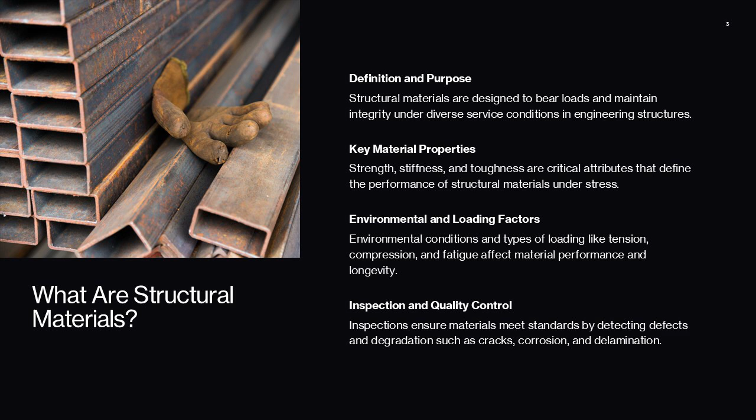From an inspection perspective, structural materials require strict adherence to specifications and traceability to ensure compliance with standards. Inspectors must look for defects such as cracks, voids, inclusions, and delamination, as well as degradation mechanisms like corrosion and creep that can compromise long-term performance. Understanding these fundamentals is essential for engineers and inspectors to make informed decisions about material selection, maintenance, and failure analysis.

The behavior and performance of structural materials are governed by an interconnected framework often described as the structure, processing, properties, performance relationship. Structure refers to the arrangement of atoms, molecules, or grains within a material, including bonding type, crystal lattice, phases, and defects such as dislocations and pores. Processing encompasses the manufacturing routes that define this structure, such as casting, forging, rolling, heat treatment, sintering, molding, and curing.

Properties are the measurable responses of the material to external stimuli, including mechanical, thermal, electrical, and chemical characteristics. Performance is the ultimate measure of how well the material fulfills its intended function under service conditions, considering factors like strength-to-weight ratio, fatigue life, and corrosion resistance.

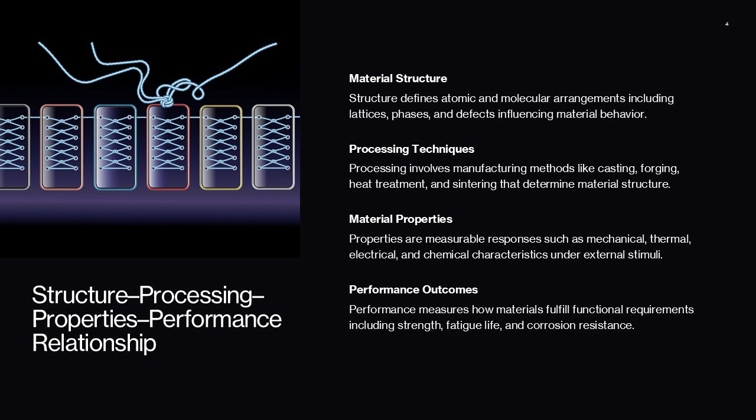For example, in metals, heat treatment can alter phase composition and dislocation density, significantly changing hardness and toughness. Ceramics rely on sintering to reduce porosity and enhance strength, while polymers achieve desired thermal stability through curing and cross-linking. Composites derive their properties from fiber orientation and matrix quality, which are controlled during layup and curing. This systemic view emphasizes that material selection and inspection must account for processing history, as it directly influences microstructure and, consequently, performance.

Materials are classified into metals, ceramics, polymers, and composites. Each class has unique bonding types and properties that influence their applications. Structural materials are broadly classified into four major families: metals, ceramics, polymers, and composites. Metals are crystalline solids characterized by metallic bonding, which provides ductility and high electrical and thermal conductivity. They are further divided into ferrous, iron-based, and non-ferrous categories.

Ceramics include crystalline oxides, carbides, nitrides, glasses, and cements, bonded ionically or covalently, resulting in high hardness and temperature resistance but low toughness. Polymers consist of long-chain organic molecules and are categorized into thermoplastics, which can be remelted, thermosets, which form irreversible cross-linked networks, and elastomers, which exhibit rubber-like elasticity. Composites combine two or more distinct phases, typically a matrix and reinforcement, to achieve tailored properties such as high strength-to-weight ratios and improved damage tolerance.

Bonding plays a fundamental role in determining properties: metallic bonding allows dislocation motion, enabling ductility. Ionic and covalent bonds confer hardness and high melting points but limit plasticity. Secondary bonds like van der Waals forces govern polymer flexibility and viscoelastic behavior. Understanding these classifications and bonding mechanisms is crucial for predicting material behavior and selecting appropriate candidates for specific applications.

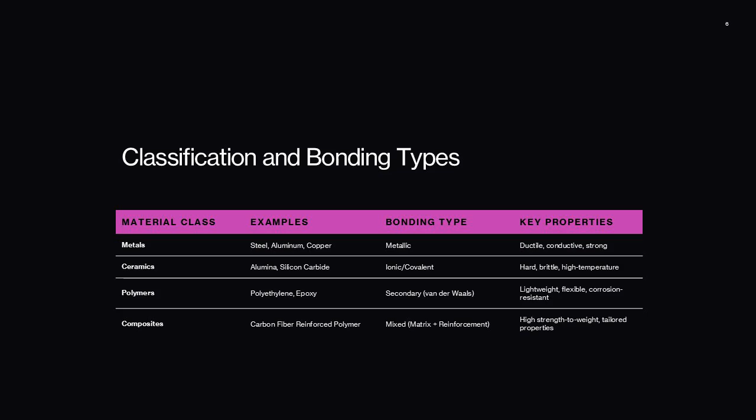Metals are widely used due to their strength and versatility. Let's look at their structure and properties, and the distinction between ferrous and non-ferrous metals. Metals are characterized by crystalline microstructures composed of grains with specific lattice arrangements such as face-centered cubic or FCC, body-centered cubic or BCC, and hexagonal close-packed or HCP. These structures influence mechanical properties like ductility, toughness, and strength.

Metallic bonding allows dislocation movement, which imparts ductility and enables plastic deformation. Metals exhibit high electrical and thermal conductivity, making them suitable for structural and functional applications. Their properties can be extensively modified through alloying and heat treatment processes. For instance, quenching and tempering in steels adjust hardness and toughness, while solution treatment and aging in aluminum alloys enhance strength. Common processing methods include casting, forging, rolling, machining, and welding, each affecting grain size and phase distribution.

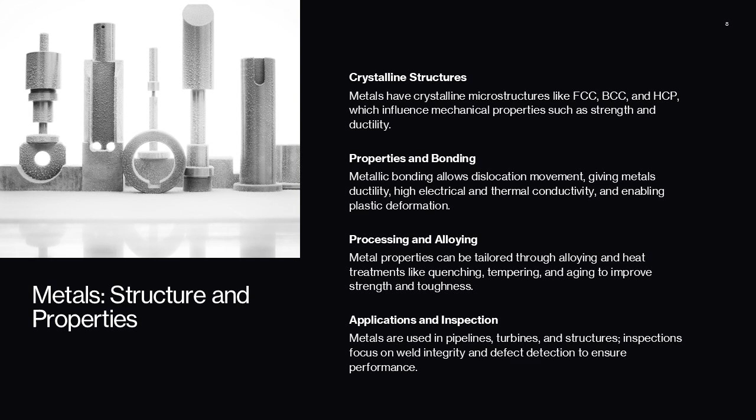Metals are widely used in pipelines, pressure vessels, structural frameworks, turbines, and electrical components. Inspection of metals focuses on weld integrity, heat treatment verification, and detection of defects such as cracks, inclusions, and porosity, which can compromise performance under load.

Ferrous metals, primarily iron-based alloys, include carbon steels, low alloy and high alloy steels, stainless steels, and cast irons. They dominate structural applications due to their cost-effectiveness, versatility, and wide property range achieved through alloying and heat treatment. Stainless steels offer corrosion resistance through chromium additions, while cast irons provide excellent damping and castability. Non-ferrous metals encompass aluminum and its alloys, copper alloys, nickel-based superalloys, titanium, and magnesium.

These materials are selected for specific attributes such as lightweight for aluminum, high conductivity for copper, high temperature strength for nickel alloys, and exceptional strength-to-weight ratio for titanium. Selection criteria often involve balancing strength, corrosion resistance, temperature capability, cost, and availability. Applications range from aerospace components and marine structures to high-temperature turbine blades and chemical processing equipment. Understanding these distinctions is essential for engineers to optimize material performance in diverse environments.

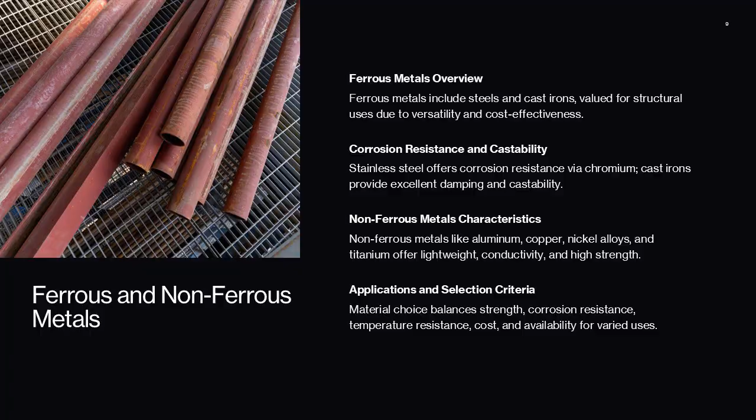Ceramics are known for hardness and temperature resistance but are brittle. We'll examine their structure, characteristics, and limitations. Ceramics are inorganic, non-metallic materials bonded ionically or covalently, resulting in exceptional hardness, high stiffness, and outstanding temperature resistance. They include crystalline oxides, carbides, nitrides, glasses, and cements. While ceramics excel in wear resistance and chemical stability, they are inherently brittle due to limited plastic deformation, making fracture toughness a critical design consideration.

Processing typically involves powder synthesis, forming methods such as pressing or slip casting, and sintering to achieve densification. Glasses are produced through melting and quenching, while cements harden via hydration reactions. Applications span wear-resistant surfaces, cutting tools, refractories, thermal barrier coatings, electrical insulators, and biomedical implants. Inspection focuses on porosity, microcracks, incomplete densification, and thermal shock damage, as these defects significantly affect reliability. Engineers must design components to minimize tensile stresses and stress concentrations, often employing compressive loading strategies to mitigate brittle failure.

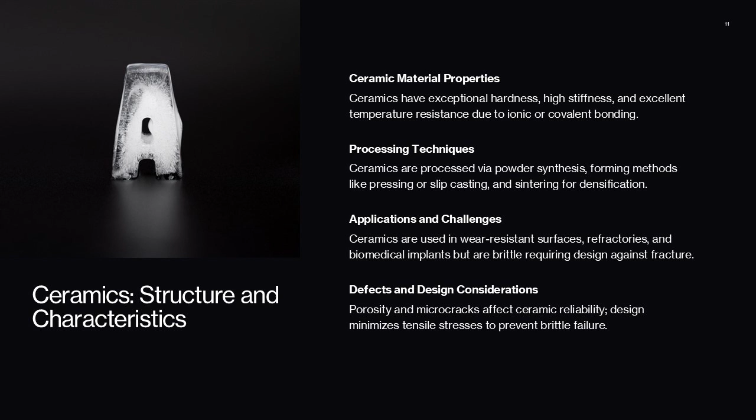Ceramics offer remarkable advantages, including hardness, wear resistance, chemical inertness, and the ability to withstand extreme temperatures. These properties make them indispensable in applications such as refractories, glass linings, and thermal barrier coatings. However, their brittleness and sensitivity to flaws pose significant challenges. Crack initiation and propagation can occur suddenly, leading to catastrophic failure. Toughening strategies include incorporating fiber or particulate reinforcements, utilizing phase transformation mechanisms, such as zirconia toughening, and refining microstructure to reduce flaw size.

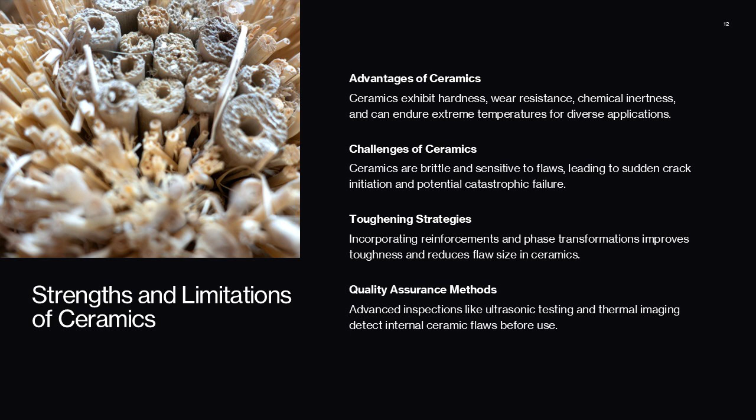Design considerations involve avoiding sharp stress concentrators, ensuring uniform densification during processing, and applying compressive stresses where possible. Quality assurance relies on defect control through advanced inspection techniques such as ultrasonic testing, acoustic emission monitoring, and thermal imaging to detect internal flaws before service deployment.

Polymers are lightweight and corrosion-resistant, widely used in piping and coatings. Let's explore their structure and design considerations. Polymers are organic materials composed of long-chain molecules, and their properties are governed by chain mobility, degree of crystallinity, and cross-link density. They are classified into thermoplastics, which soften upon heating and can be reshaped, thermosets, which form irreversible cross-linked networks during curing, and elastomers, which exhibit rubber-like elasticity due to coiled molecular chains.

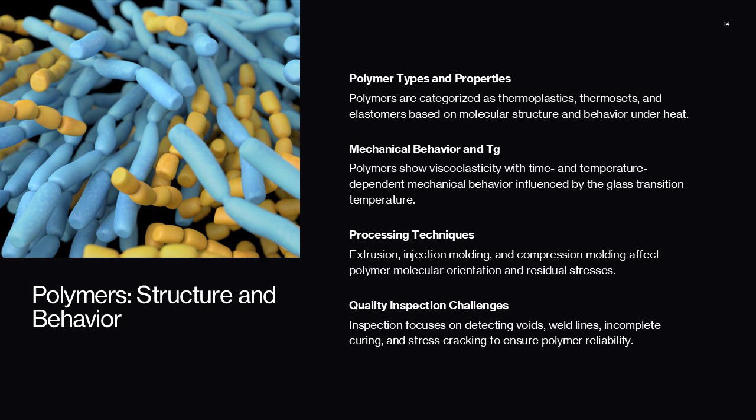Polymers are lightweight, corrosion-resistant, and easily processed into complex shapes, making them attractive for numerous applications. However, their mechanical behavior is time and temperature dependent due to viscoelasticity. The glass transition temperature, Tg, marks the shift from rigid to rubbery states, influencing performance under varying conditions. Processing methods such as extrusion, injection molding, and compression molding determine molecular orientation and residual stresses, while curing schedules for thermosets are critical for achieving desired properties. Inspection focuses on detecting voids, weld lines, incomplete cure, and environmental stress cracking, which can compromise long-term reliability.

Polymers provide significant advantages, including low weight, corrosion resistance, electrical insulation, and cost-effective manufacturing of complex geometries. These benefits make them suitable for piping, liners, housings, seals, coatings, and even 3D printed components. However, engineers must account for limitations such as creep under sustained loads, susceptibility to UV and chemical degradation, and thermal constraints relative to Tg. Design strategies include reinforcing polymers with fillers or fibers to enhance stiffness and strength, selecting appropriate grades for thermal stability, and incorporating additives for UV protection and flame retardants.

Environmental factors like humidity and chemical exposure must be considered to prevent premature failure. Inspection techniques may involve hardness testing, differential scanning calorimetry for cure verification, and visual or ultrasonic methods to detect defects and degradation.

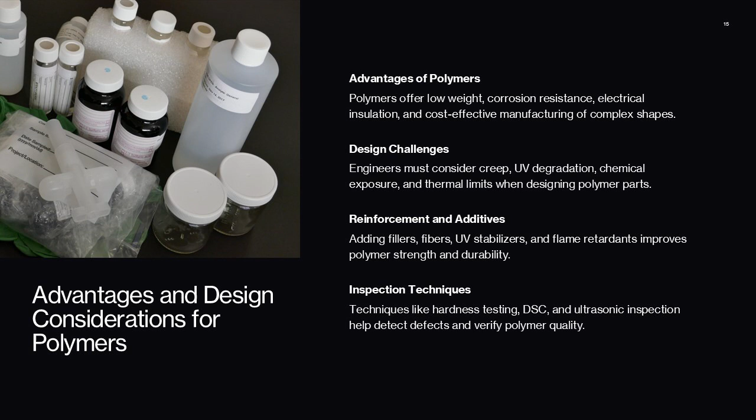Composites combine matrix and reinforcement phases for tailored properties. We'll look at their architecture and mechanics. Composites are engineered materials combining a matrix phase, metal, ceramic, or polymer, with reinforcements such as particles, fibers, or layers to achieve tailored properties. The primary goal is to optimize stiffness, strength, and weight while improving damage tolerance and thermal stability. Common architectures include particle-reinforced, fiber-reinforced, and laminar composites, each offering unique performance characteristics. Fiber-reinforced polymer composites dominate aerospace and automotive sectors due to their high strength-to-weight ratios.

Key variables influencing composite performance include fiber volume fraction, orientation, interface quality, and defect content such as voids and delamination. Processing methods like layup, filament winding, pultrusion, and resin transfer molding control these parameters, while curing and consolidation ensure structural integrity. Inspection focuses on detecting defects such as fiber misalignment, voids, and poor adhesion, often using ultrasonic or thermographic techniques.

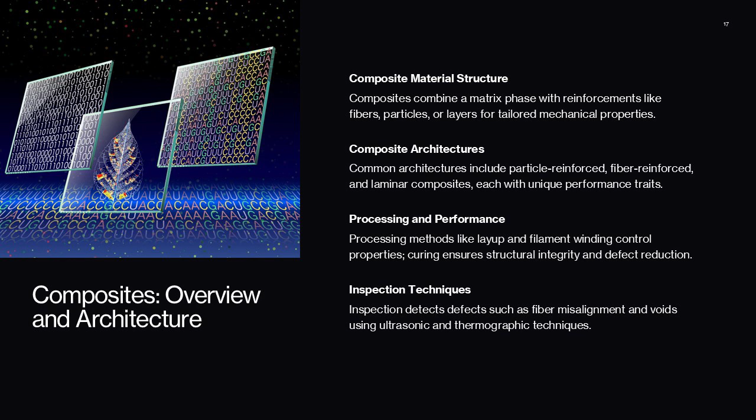The mechanical performance of composites relies on effective load transfer from the matrix to the reinforcing fibers through the interface. Fiber alignment maximizes axial properties, while the matrix provides shape, environmental protection, and shear transfer. The rule of mixtures conceptually predicts axial stiffness and strength based on fiber volume fraction and properties, but transverse and shear behaviors depend heavily on matrix and interface characteristics.

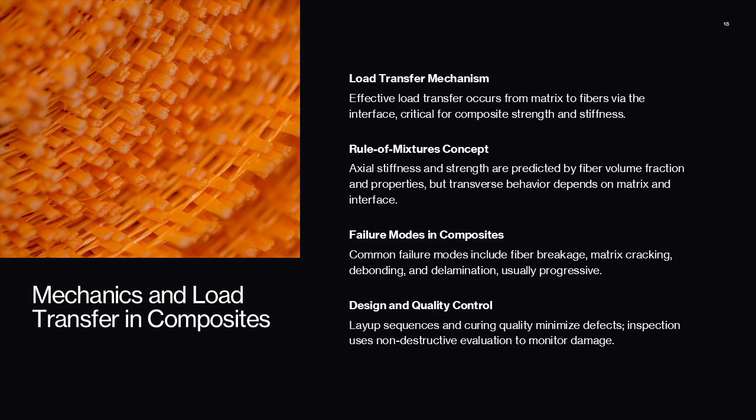Failure modes in composites include fiber breakage, matrix cracking, debonding, and delamination, often occurring progressively rather than catastrophically. Design strategies involve selecting layup sequences to accommodate multi-axial loads and ensuring high-quality curing to minimize voids and defects. Inspection and maintenance require advanced non-destructive evaluation techniques to monitor damage evolution throughout service life, emphasizing the importance of quality control during manufacturing.